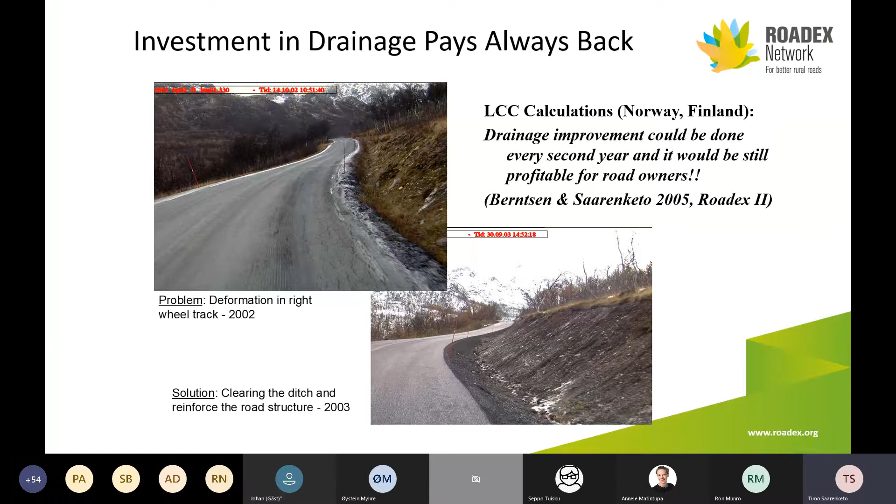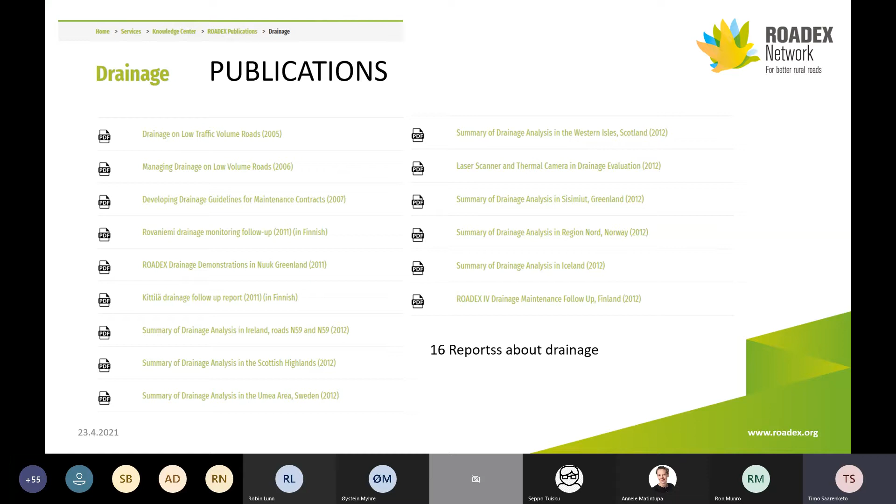The focus on drainage can also be seen when you look at the ROADEX publications. From the ROADEX history, we have already published 16 reports on drainage. So it's a good number on drainage, and then there are also other studies and publications out there. And about ROADEX e-learning, we've also been following people who are visiting and reviewing it. That shows that it's not only in the northern periphery area that drainage is a hot topic. In our review we have found that the drainage e-learning has all the time been the most popular.

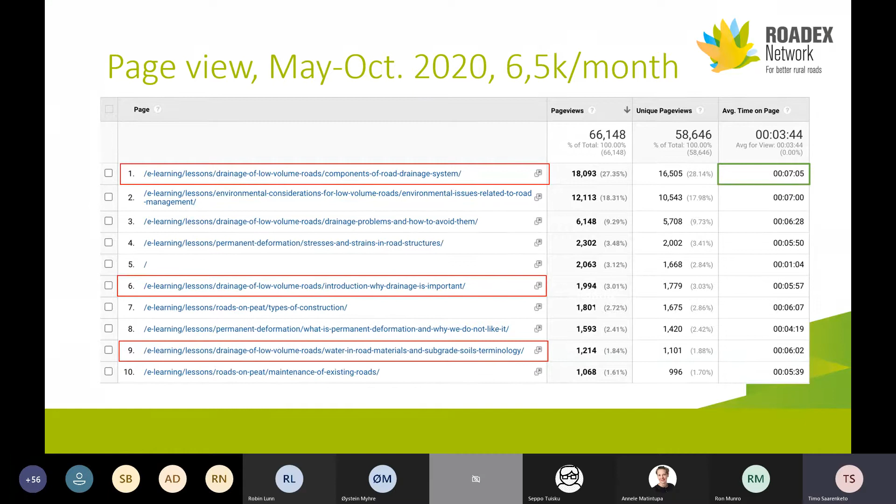And here you can see last year, from May to October, about 4 or 5 months. We have had about 6,500 visitors each month on the whole ROADEX web pages, but from May to October we have had more than 20,000 visitors only on drainage e-learning. And they are not just making a short visit, because the average time staying in this e-learning has been 7 minutes. So they've been really looking for that.

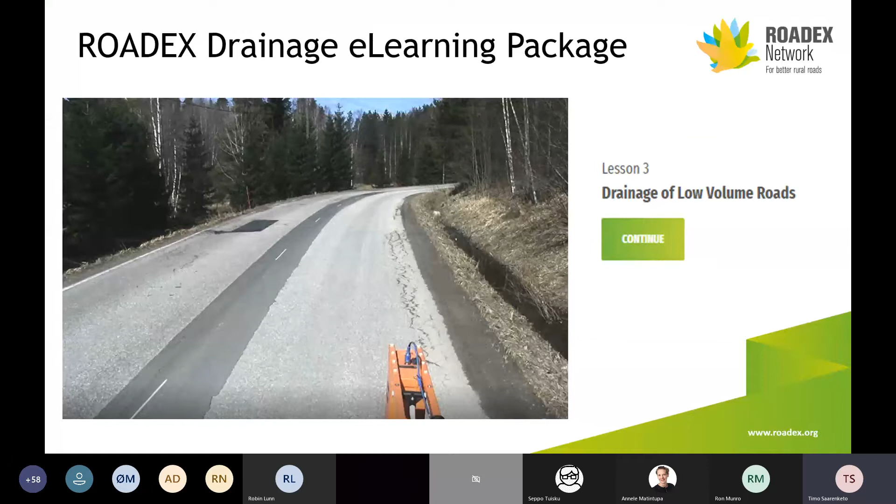But let's start with the drainage e-learning package and see what we can find there. First of all, the first lesson on drainage is what we call the introduction, where we tell why drainage is important. First of all, a little bit about history: even in Phoenician times they were using drainage structures. Then about drainage design and maintenance, erosion issues, splash and spray. And on the right-hand side, you can see one really nice example of the benefit of drainage. This is from Ireland, road N59, which was one of the test roads when we did a demo in Ireland, and it shows the rut depths in 3 classes, and rut and also factors.

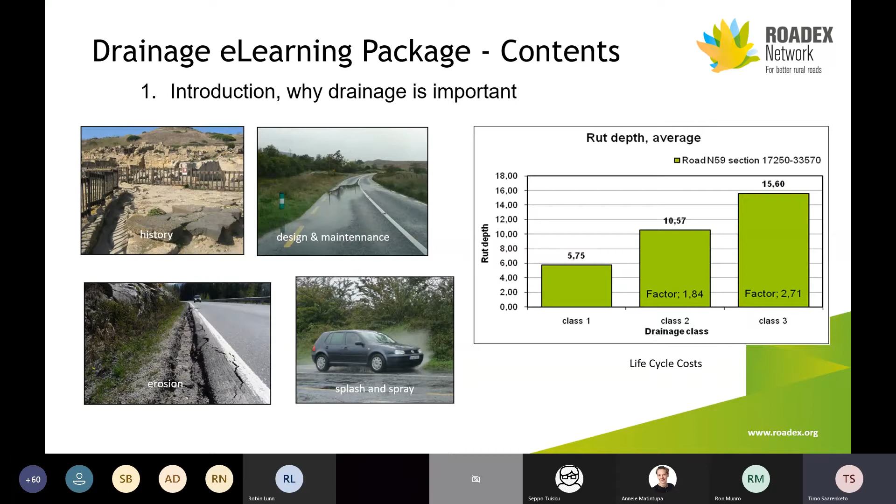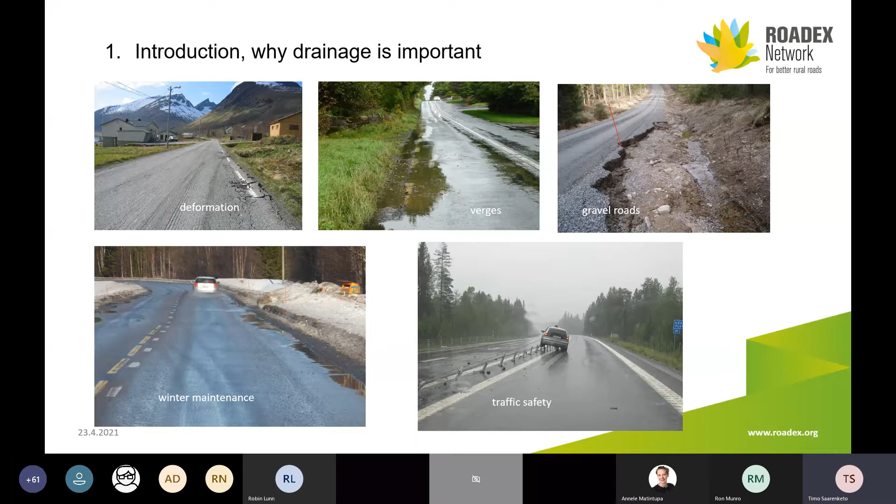In class 3 with the poor drainage, you can see that the rut depths are 2.7 times deeper compared with the road sections where the drainage is more or less okay. So in Ireland the issue is definitely permanent deformation when water is present. Deformation in general is the main issue causing problems, but also some maintenance issues, like soil verges or grass verges, are causing problems, as well as erosion issues and winter maintenance, which we will talk about later in this session, and of course traffic safety, aquaplaning. So water rutting is one parameter that we always have to keep in mind when talking about drainage.

In addition, when you are in cold climate areas, drainage can be related to differential frost heave and frost action. And why is that? Basically, in order to make ice lenses, there are three things you have to have in the road structure. One is minus degrees, and the other is that you have to have unfrozen water available in the structures. If you don't have water available, you cannot develop ice lenses.

And here's one nice example of Highway 4 from Rovaniemi, where this private or bicycle path access road culvert is not working, so all the water is blocked here and flowing under the road and making a frost heave which is more than 100 millimeters.

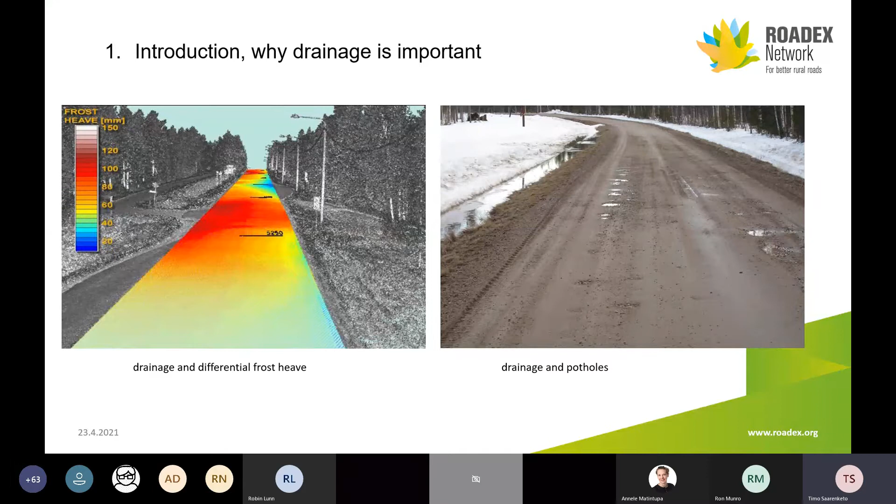Another issue when talking about low volume roads is on the right hand side, where we have found out on the surveys that potholes on gravel roads can be related very well to the presence of poorly working drainage, especially in the springtime, which is right now going on here in northern Finland. If your ditches are filled with water and the top part of the pavement structure is saturated, these potholes develop. In the continuous monitoring of these roads, we have found that when it gets saturated, even though you are grading, they appear again within a few weeks. So these issues where you have to send a grader to make gravel roads even can be related to the sections where your drainage has some kind of issue.

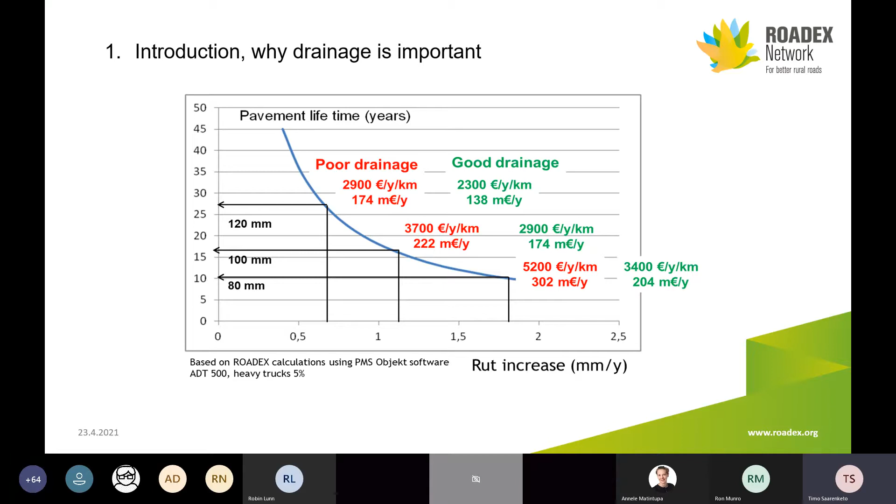Then, from the motivation side, about the science and theory of drainage, we have a pretty good package there, starting even from the molecular level: what is water and why it is important. What we are telling in this e-learning is that water molecules are bound when they are adsorbed from the air to the mineral grain structures in the pavement structure. They form different types of layers, and the important layer for understanding performance is what we call the adsorption water layer, which means that very close to the surface the molecules are very well oriented, and the orientation is so tight that it equals very close to ice. Then the bonding gets looser and looser until you start to talk about viscous water and capillary water.

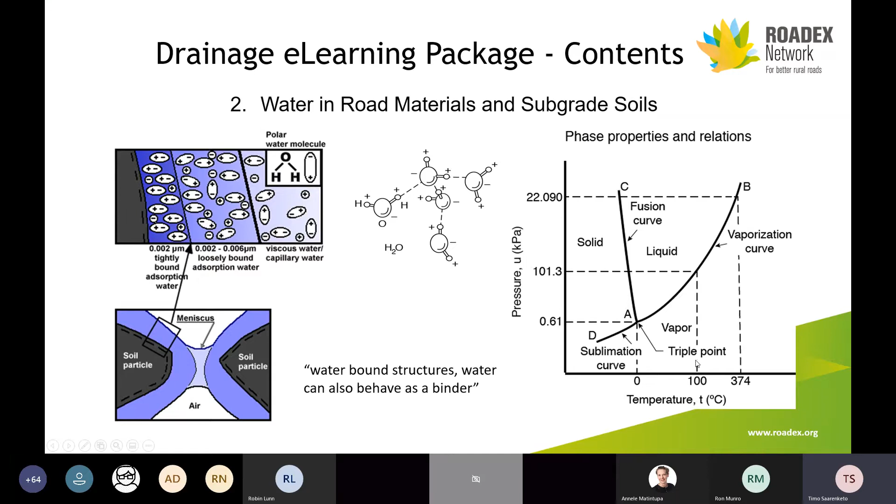But thanks to this orientation, we can tell also that water, when you are talking about what we call unbound pavement structure in general, for instance in the USA, many researchers talk about waterbound pavement structure, because water can also behave as a binder when you have enough compaction and water is very well arranged. It actually causes quite strong tensile forces between the soil or mineral particles in the pavement structures. Also then about different forms of water molecules, whether it is solid or liquid or frozen liquid, or in vapor form. So that is discussed. Then we also try to tell a little bit about the viscosity of the water, which is causing this tensile strength.

And here's one demo of what we can see and measure right now in the Percostations during the spring thaw weakening. Here's a demo about electrical conductivity during the thawing period in the mineral structure. So this light blue equals frozen material in the pore water, and these dots are colloidal particles, which are always pushed when ice is frozen, so colloidal particles are pushed between the mineral particles and ice.

And once the ice starts to thaw, these colloidal particles are first coagulated, they are spreading, and later on they are flocculating. And when they are flocculating, they are making bigger grains and the electrical conductivity is decreasing. But especially in this peak area,

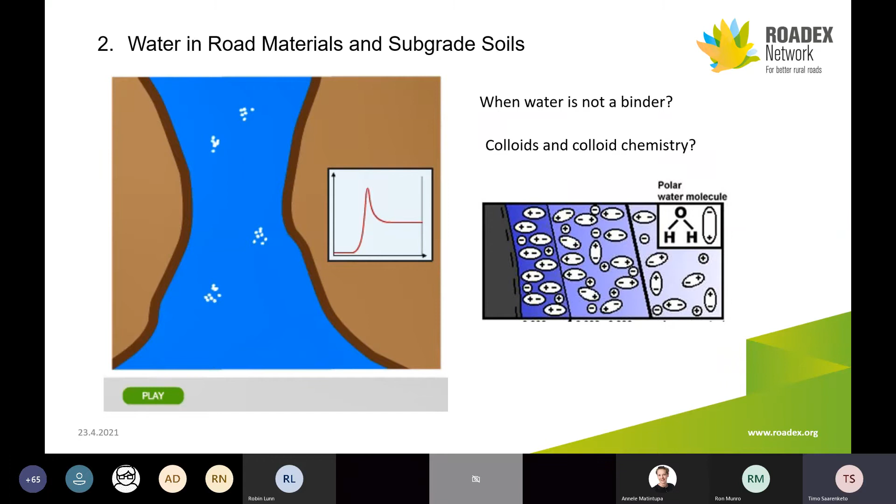when they are spread equally all over the water, the conductivity is high and the tensile strength is very low, and that is caused by colloids and colloid chemistry, like washing powders. When we are using washing powders and cleaning our clothes, it is exactly the same chemical principles. Then water zones, where you have a groundwater table, capillary water table, and then what we call intermediate

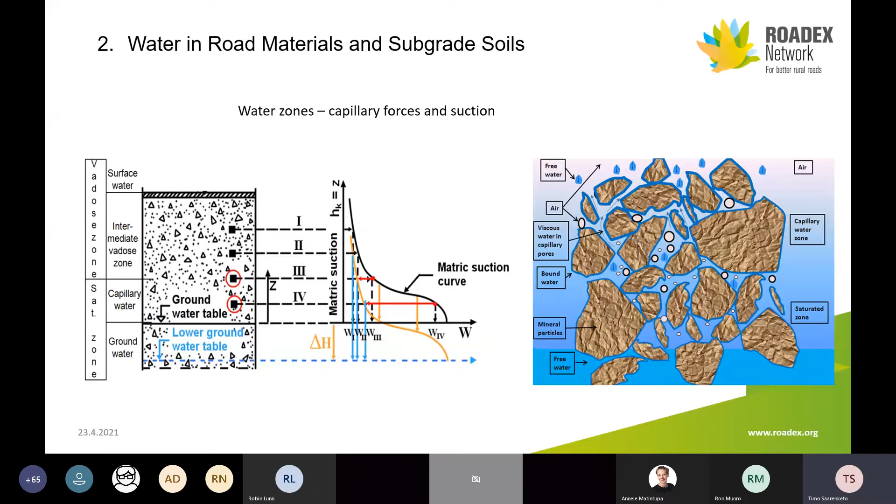water zone, which is what we call in general the dry material, and also in that way we compare back and try to explain very much on capillary forces and suction. In general, for instance, in Finland, suction has not been so familiar and has not been taught much in civil engineering, and we've been in general talking about only capillary forces. But right now in thermodynamics, suction explains much more clearly how the road is behaving.

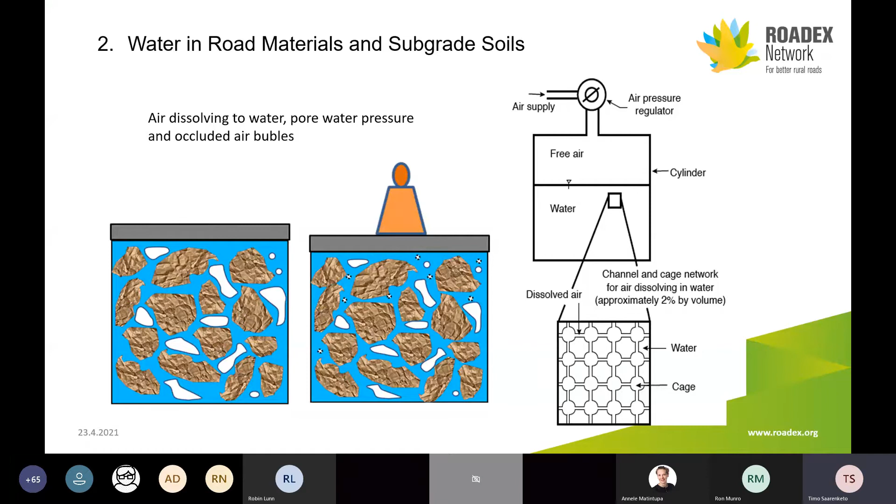Also, one important thing in order to understand the recovery times in the road is understanding the phenomenon that air in the pavement structure is dissolving into the water, and that is part of the pore water pressures and how the occluded air bubbles are behaving. And this can be related to the permanent deformation of the road structure.

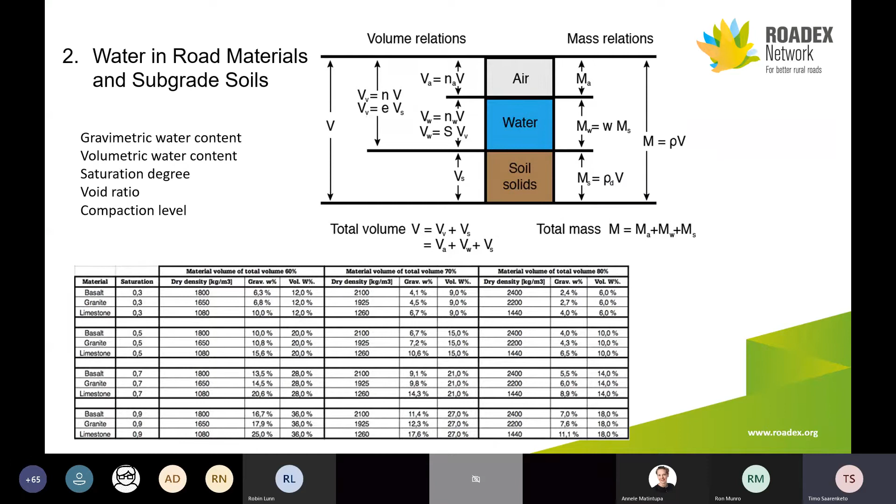Then a more easy and basic issue, which is still sometimes misunderstood and ignored, is what is gravimetric water content, what is volumetric water content, what is saturation degree, what is void ratio, and what is compaction level. In understanding this, water content can be volume ratios, but it can also be mass ratios. And there are some tables where you can get a very nice idea of what the densities are when your material volume is, for instance, 70%, what type of densities you are having at different moisture contents on gravimetric and volumetric water content. This helps understanding the compaction issues.

Also, water content is very much affecting compaction. The theory is about what happens when you are compacting in low moisture contents: you have to apply a lot of force in order to break this bound water structure to get good friction between mineral grains. But then the other issue is that if you are going higher than Proctor water content, which is the optimum water content, you might be facing problems with positive pore water pressure

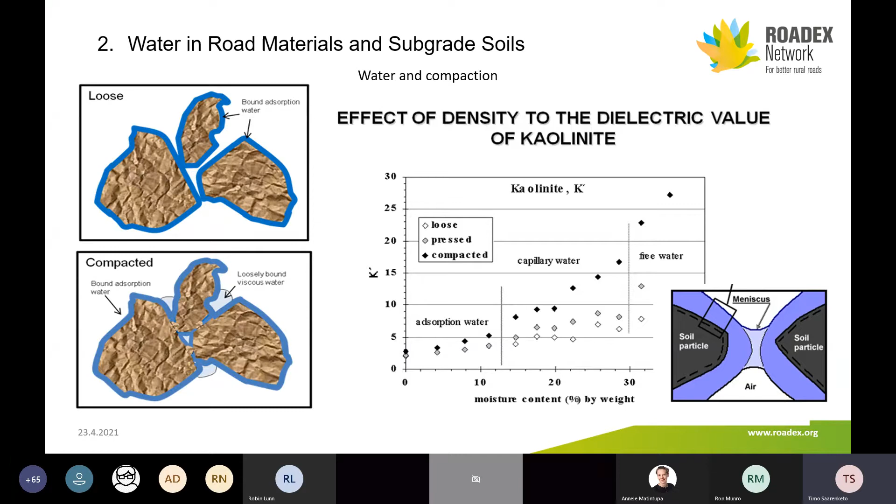and plastic deformation. So basically, for instance, this is a kaolinite clay with 3 different compaction degrees, and normally the optimum Proctor content is at the phase where your capillary water is, in kaolinite, around 20 to 25%. So that is where your capillary water still has a concave meniscus between the capillary water and the air. So you still get quite good strength.

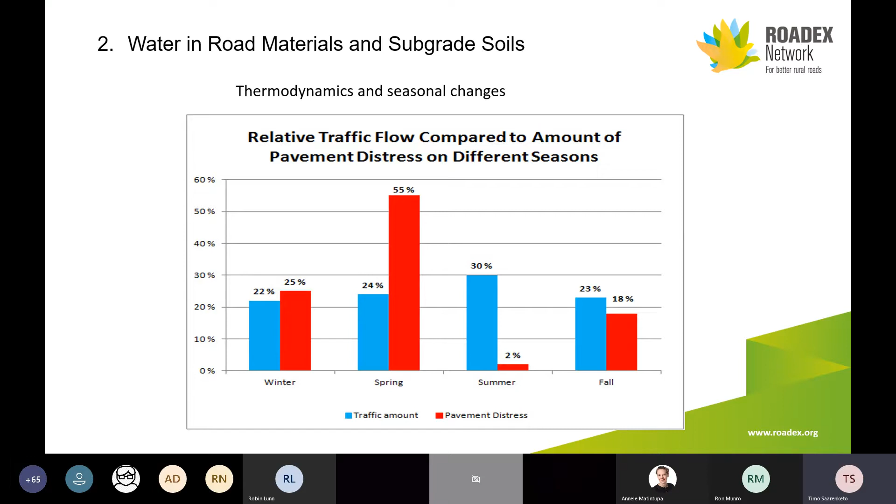Also about thermodynamics and seasonal change, understanding that when we are designing a road and making materials, we are assuming that pavement lifetime is a function of axles. But the fact is that if you are comparing traffic amount and pavement distresses, and this is also results from the USA, you can find out that even though the traffic volumes over the year are almost the same, 80% of the pavement distresses appear in winter and especially spring. And that means that pavement lifetime is not only a function of loading, but seasonal change also has a major impact on our lifetime.

And when we are talking about seasonal change in general, in thermodynamics we have to understand suction. And there are three types of suction. What we have to know is, first of all, in unfrozen material, it is matric suction plus osmotic suction, which equals total suction. And matric suction is very much a function of fines content. So the higher the fines content you have,

the stiffer is the material when it's dry, but it loses strength when the water content is increasing. It's like clay, a good example. On the other hand, osmotic suction is not dependent on water content, and a good example of osmotic suction is dust binders.

If you put chlorides in your gravel roads for dust binding, it causes so much tensile strength between the particles that you don't have a dusting problem.

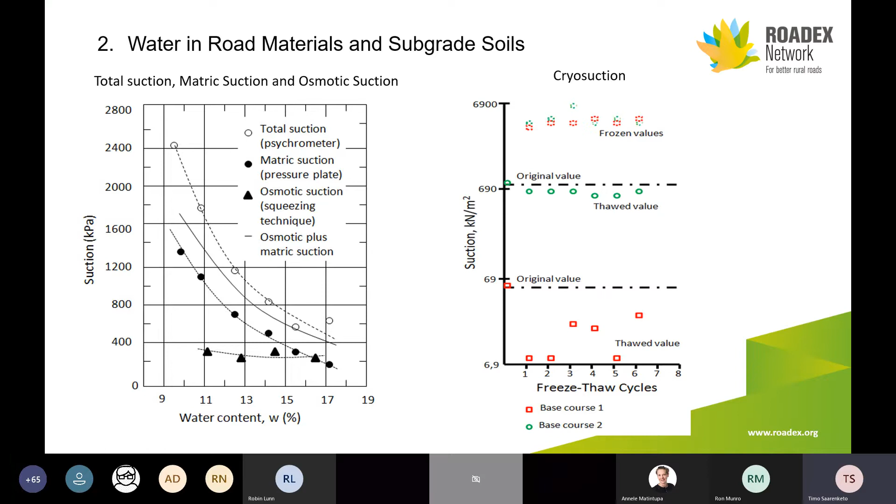Then, continuing with water and mechanical properties, it's a lot of material, but one issue, and this is a new understanding right now, is saturation degree and dielectric value. A very interesting finding, which we didn't know when ROADEX started, comes thanks to Andrew Dawson, who has written an excellent book, Water in Road Structures. He had a theoretical idea, and he published that once the saturation degree is around 80% in normal aggregates, then air bubbles are occluded.

That means that if you are compacting or loading the material, these air bubbles cannot escape anywhere. And that is increasing pore water pressure, or if you have a very high load, it causes the air to dissolve into the pore water, and then the water loses all these tensile properties. What was really interesting is that when we later calculated, Andrew Dawson's theory about 80% saturation degree equals a dielectric value of 16, and from ground penetrating radar data we knew that is exactly the plastic limit where, for instance, base course material loses its strength. So that starts to explain more about what happens when we have wet materials and we are loading them.

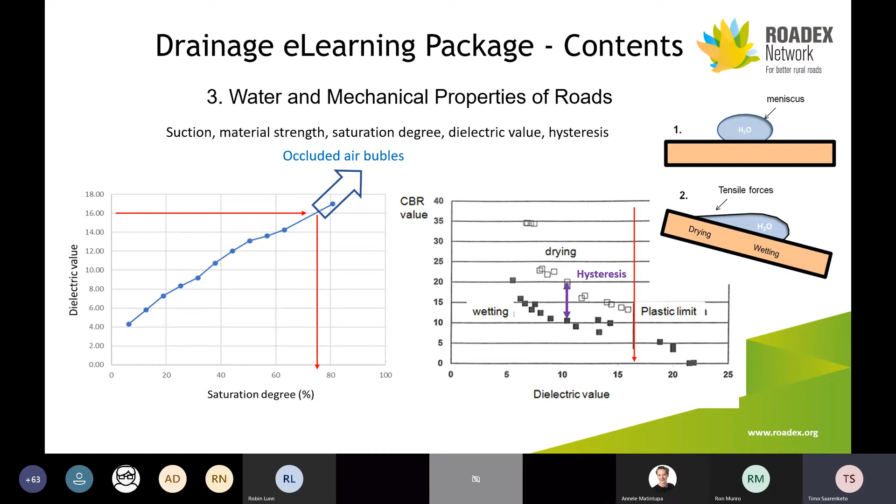That tells you the great difference, and it can be explained by hysteresis, which can be described as if you put a water droplet on a glass and then start to tilt the glass plate down, so you are developing tensile forces. That's the classical explanation of hysteresis and how it forms tensile forces when the material is drying.

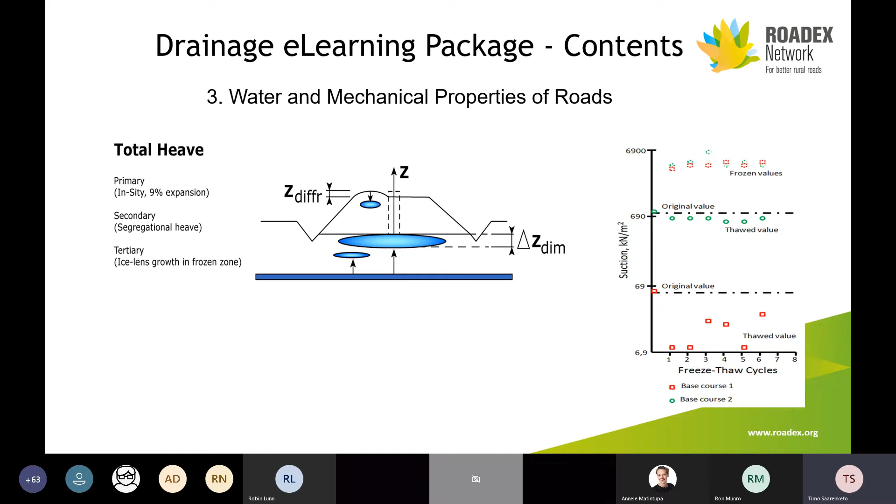Finally, a new thing explained in the updated ROADEX drainage e-learning package is frost heave, and especially these tertiary ice lenses. This is a new issue published and introduced by Swedish researchers from the Technical University of Luleå, and the term is tertiary ice lenses, the ice lenses that grow in the frozen zone. And what I'll show is that the theory explains very much what we have been finding on roads, especially if you have delayed snow removal.

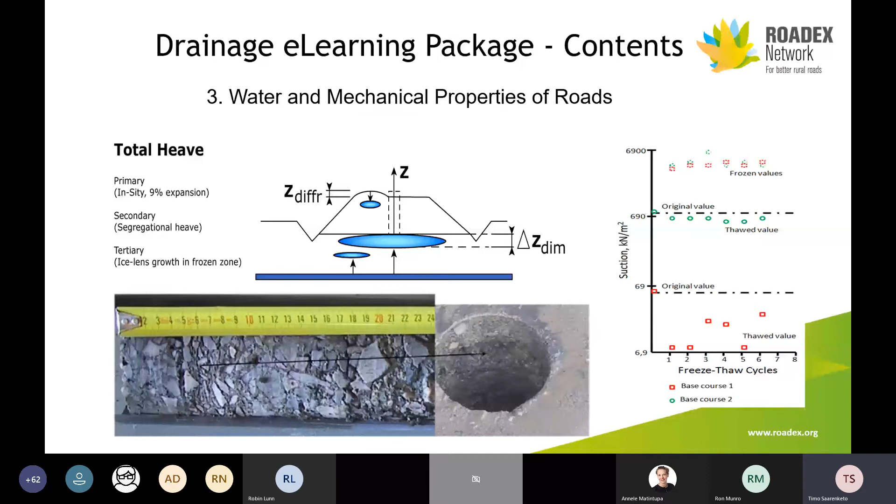Also, this high suction is an explanation for why suction forces can be so high that they can develop ice lenses even inside the asphalt. This example is from the first winter of the Kemi-Tornio motorway in Finland, where we had problems in the top part of the asphalt, forming ice lenses because of de-icing salt.

Then chapter 4 is explaining the components of road drainage systems. It is in general divided into three areas: road drainage structures, dewatering structures, and structures outside the road body. This road drainage and dewatering is interesting terminology, because for instance in the Finnish language we have only one word, kuivatus, which covers both drainage and dewatering.

But basically dewatering, in Swedish and English, means the structures that ensure that when it's raining, the water is removed really fast from the surface of the pavement structure, and the drainage structures in general are designed to keep the whole pavement structure dry.

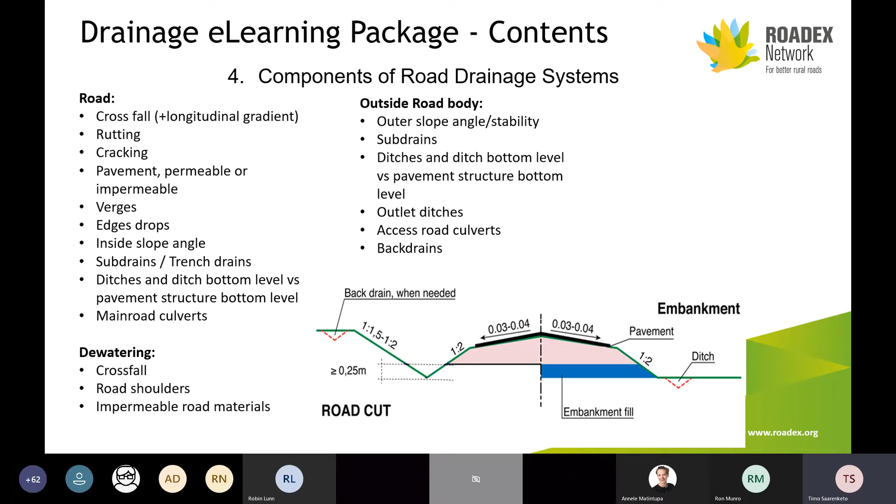Then we talk about the foreslope ditches. We are publishing new information about the importance of keeping ditches deep enough. Here are some case studies from research of the Pehko project, where we have been implementing this ROADEX know-how in Finland and testing it. This shows ditch depth from the pavement surface as a function of annual rut increase. What you can see is that on main roads in Finnish Lapland, the anomalous rut increase is mainly where the ditches are shallow, and the deeper the ditches are, the fewer anomalous structures you have.

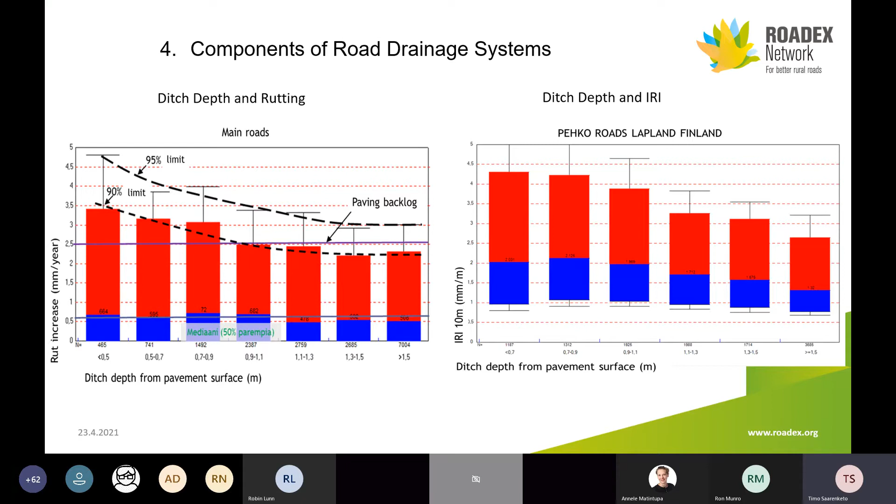The same issue, even more clear and even better correlation, even with the median values, can be seen if you start to monitor ditch depth versus IRI. Once you go to deeper ditches, for instance ditches less than 70 centimeters, median IRI is 2. When you go 1.3 to 1.5, you are already at 1.6, and if it's more than 1.5 meter deep ditches, median IRI is 1.3. So for road roughness and how smooth the road is, it's a clear correlation.

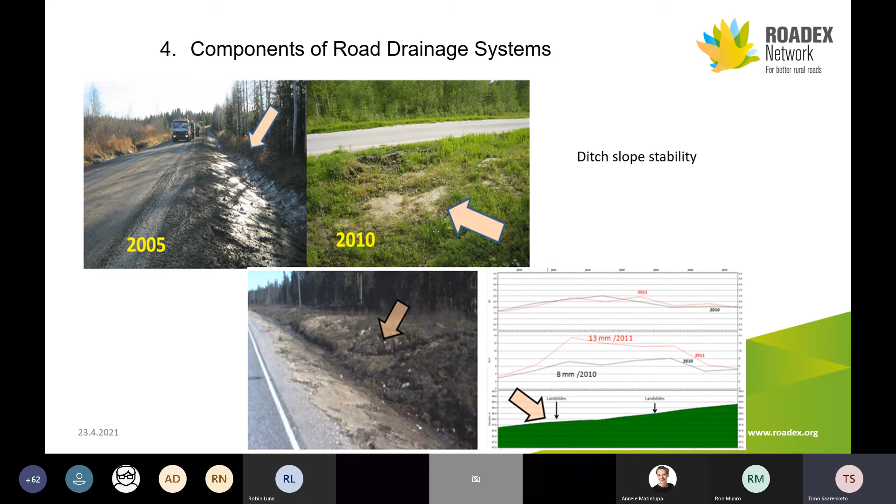Very important on the main road ditches is also slope stability, and how important in the daily maintenance it is, first of all, to check that all the ditches are clear, and if you have some flow and ditches get filled, you have to clean them immediately. There is an example that if this was not cleared, in one year you would get about 5 millimeter rutting, because all the water is infiltrated to the pavement structures.

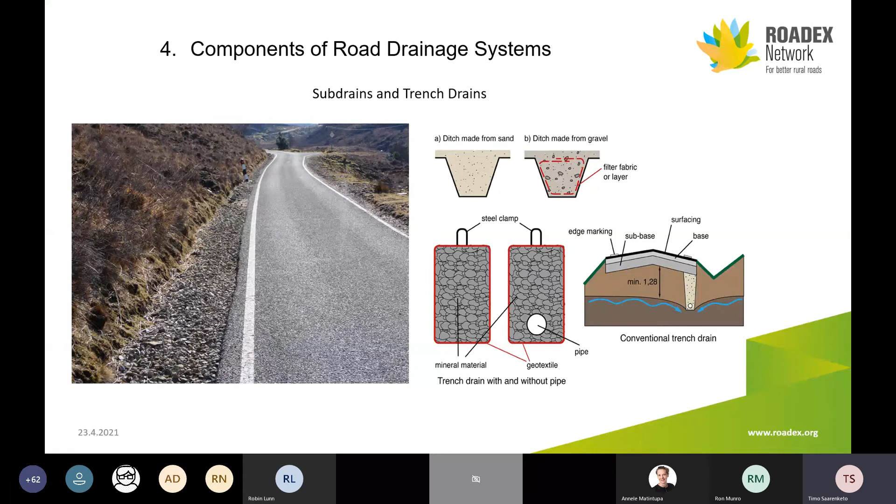Also in many areas you don't have enough space to make open ditches, or if you are in mountain areas, there are other issues. There are chapters and explanations about different types of subdrain structures and trench drain structures, how they are built, and what things should be kept in mind on these structures. Then, I don't have an example, but there is a lot of explanation about outlet ditches, what problems there are, and what you have to keep in mind when working with them.

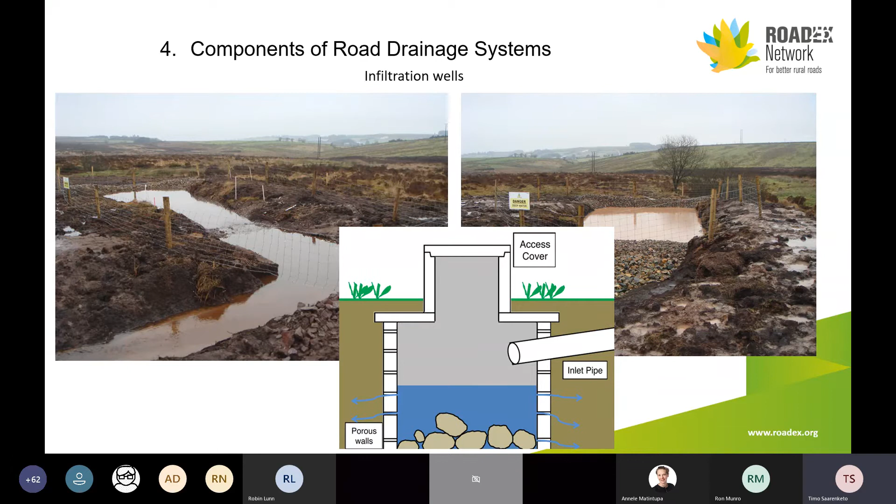But one issue, and these examples are from Scotland, and what we've been hearing also from other parts of the world, is that if you cannot make outlet ditches for some reason, then a very good option is infiltration wells and their structures. For instance, in national parks or nature protection areas where you cannot excavate ditches, you probably can make an infiltration well to ensure this water infiltrates to the subgrade soil, and it can be a very environmentally friendly structure.

Then also experience and information about main road culverts: how you should install main road culverts, what the no-go structures are, and what issues you have to keep in mind when you are building and checking that your main road culverts are built in a good manner.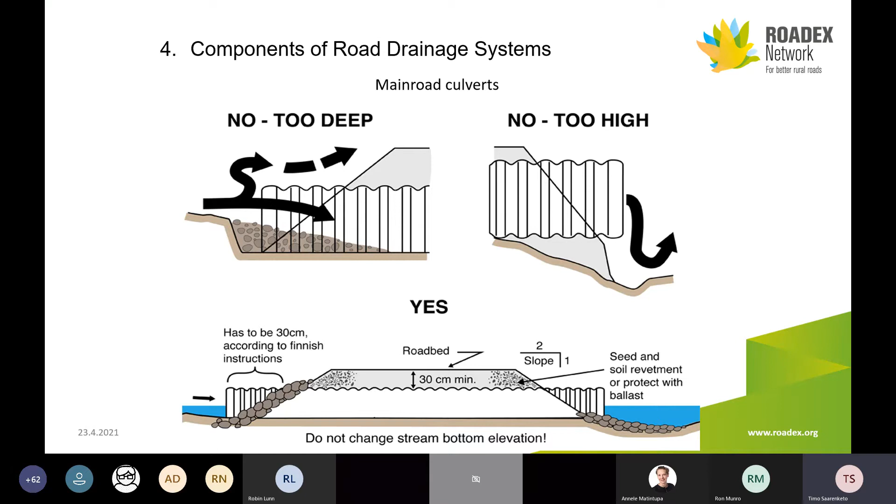Then about dewatering, one issue is pavement crossfall, how you build that, and how you make sure that pavement crossfall is made in such a way that water is quickly removed from the pavement structures, and you don't have a risk of aquaplaning.

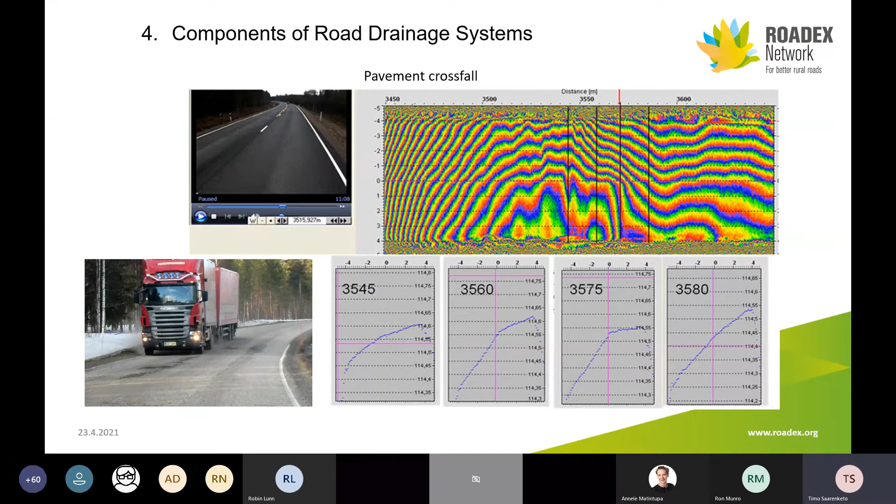But on the other hand, in this case we are also showing an example of how important it is to have very smooth changes in the pavement crossfall, especially when coming into or leaving curves, because the ROADEX reports about traffic safety and human body vibration have shown that, quite surprisingly, about 50% of truck accidents can be related to a road with a rapidly changing crossfall. So this is also a traffic safety issue.

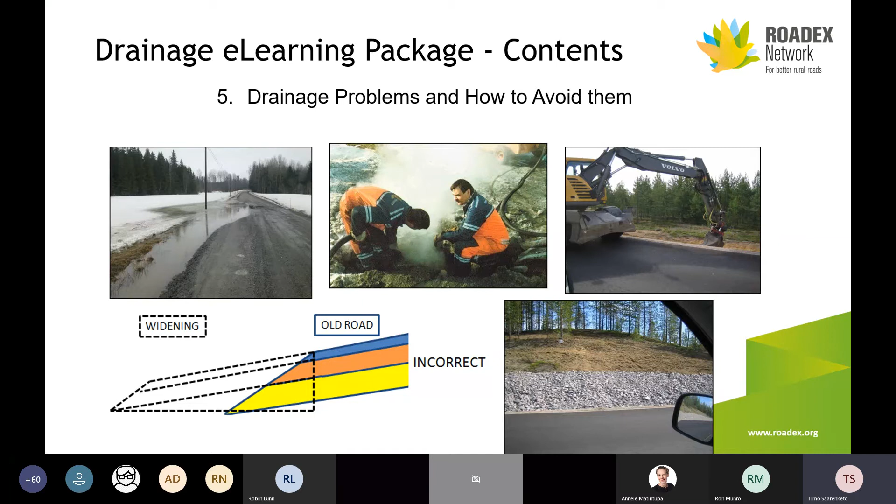Chapter 5 in the drainage eLearning is drainage problems and how to avoid them. We've tried to list all the typical problems, what can be done, the correct ways to do maintenance or road design, and how you can fix these problems. As a very simple example, we can still see these mistakes: when clearing the ditches, you excavate the dirt or mud from the ditch bottom and put it on the inside slope.

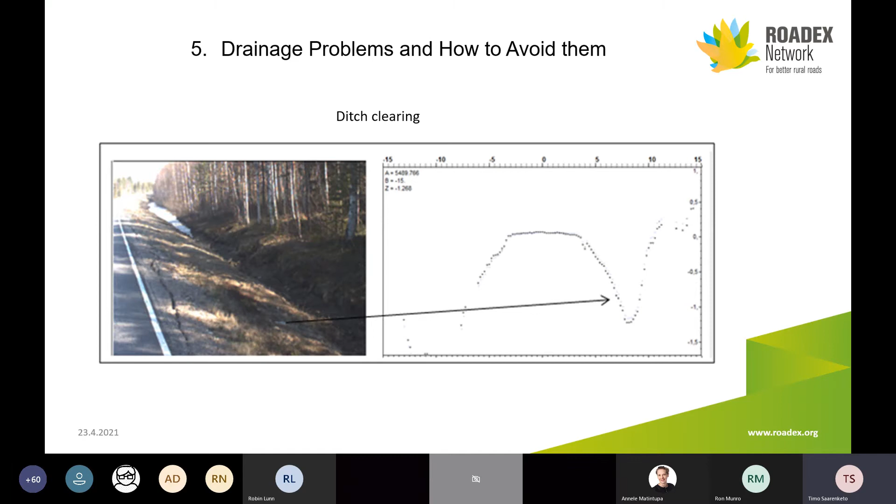There is a lot of experience now that if you store this mud or dirt there, it flows almost immediately back to the bottom of the ditches. You can even see here that it is already starting to develop cracks in these areas, and within only 1 or 2 years the material is back on the ditch bottom.

The other issue, a very new finding that I already mentioned, is snow removal from the road shoulders. If you have thick snow walls and in winter you have warm days, and the water from the thawing snow starts to flow, at the same time you have very high frost suction in the base course under the pavement, and negative pore water pressure, so all the water flows there. When cold days come again, it freezes and forms ice lenses, and you can have like 120 or 130% saturation level. And when this finally starts to thaw, you have a problem.

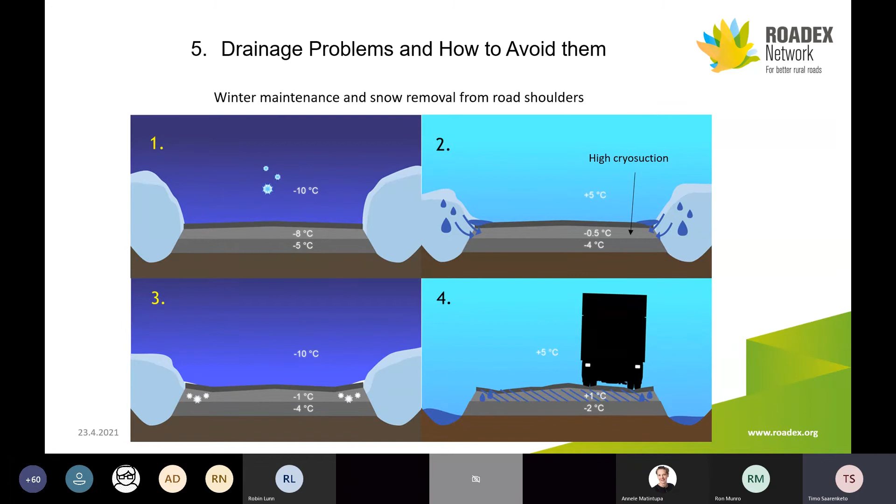You have major deformations on this way. We have very dramatic experiences about this phenomenon from previous winter in Pehko area in central Finland. Here's a nice example also of how clear you have to do work on that, which is these reflection poles.

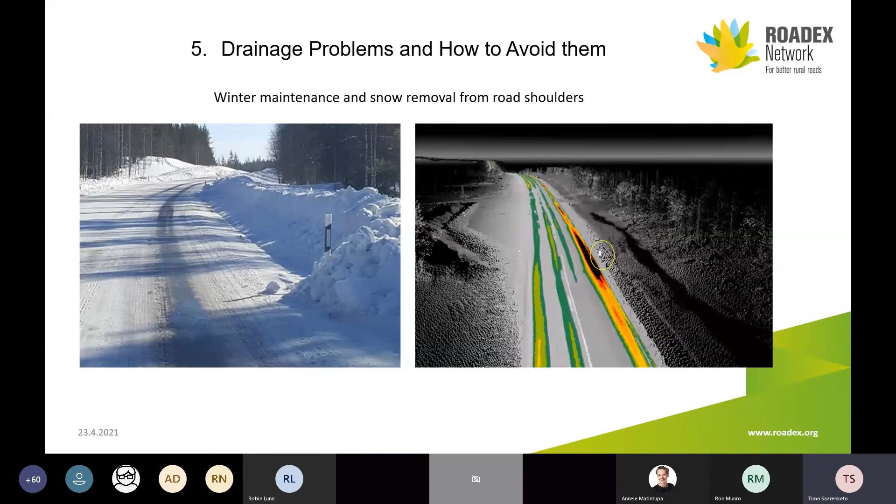In the early days, there were no machines, so you had to go around when you were removing snow. When we started to measure with the LiDAR laser scanner, we could find in road sections that always on the snow pole you get high rutting. Even this amount of snow could cause a localized deformation on the pavement in these tracks, in these sections.

Also private access roads - this is also Pehko. Research has shown that about 10% of the annual paving cost can be increased by poorly performed private access road drainage problems.

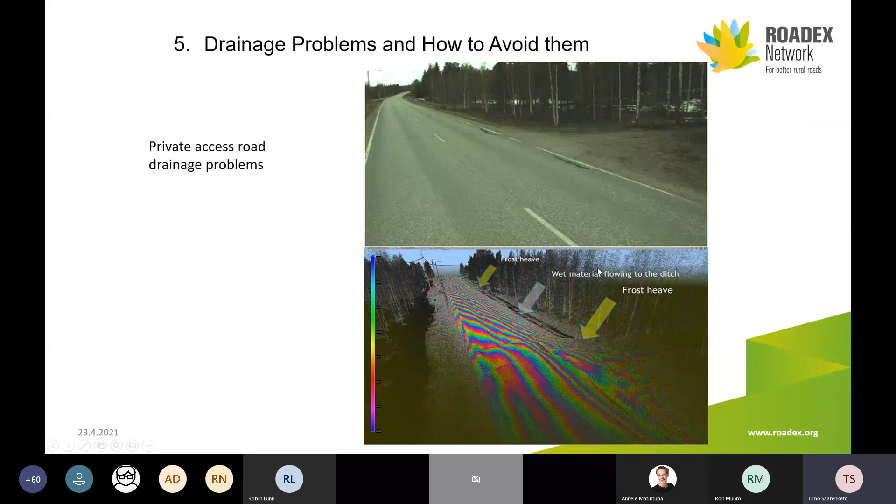The issue is that it's not only on the access road, but if it's making a pool above, you can get the first frost heave issue where the pool ends. Then you have wet mud flowing to the ditches, and finally in this area you have the frost heave. So it can be a long area where this missing or clogged culvert can cause problems.

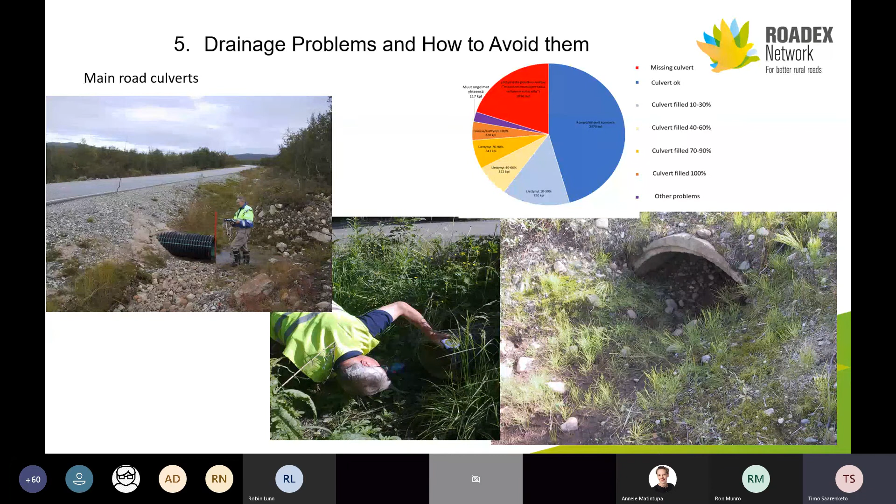But also main road culverts - we are describing how to check them, how to process them, what are the methods, how to check the condition, how you can show where they are, and how you are checking, for instance, the percentage of how much the culvert is filled.

Then there are some technical descriptions about, for instance, outer slope support and drainage structures. If you are on sloping ground, side sloping ground, and your material is unstable and flowing to the ditches, then you use this kind of structure where you are basically making a subdrain on the bottom of the ditches.

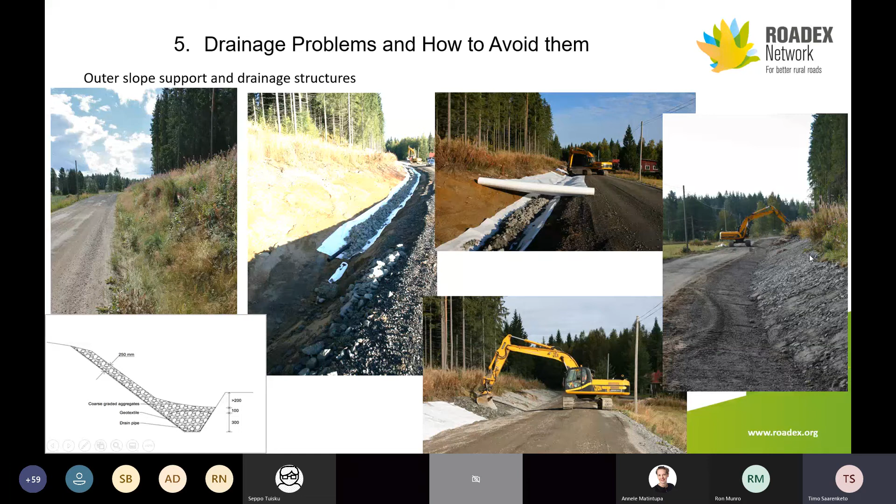And partly filling the ditches. We've been testing this in central Finland, and these structures were made with Tampere Technical University, with very good experiences.

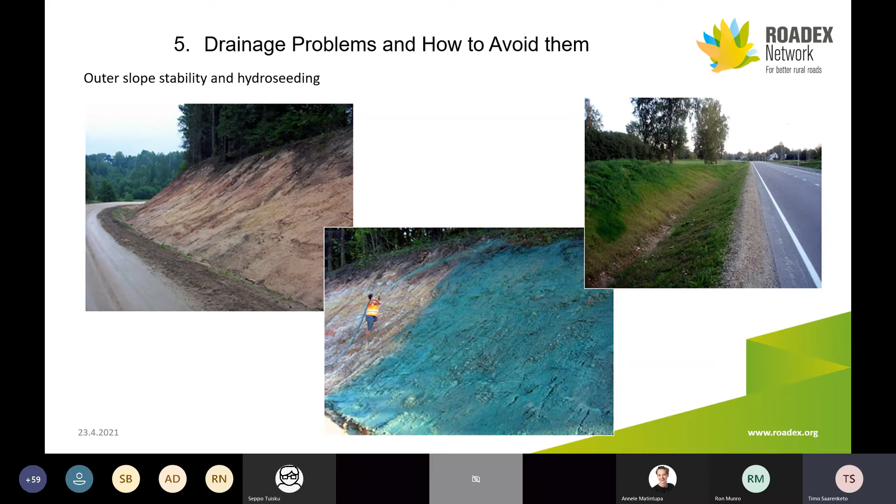Also some more exotic solutions like hydroseeding, where you are stabilizing the surface with a sort of bio-glue and grass types that make deep roots, with quite good experiences of these structures as well.

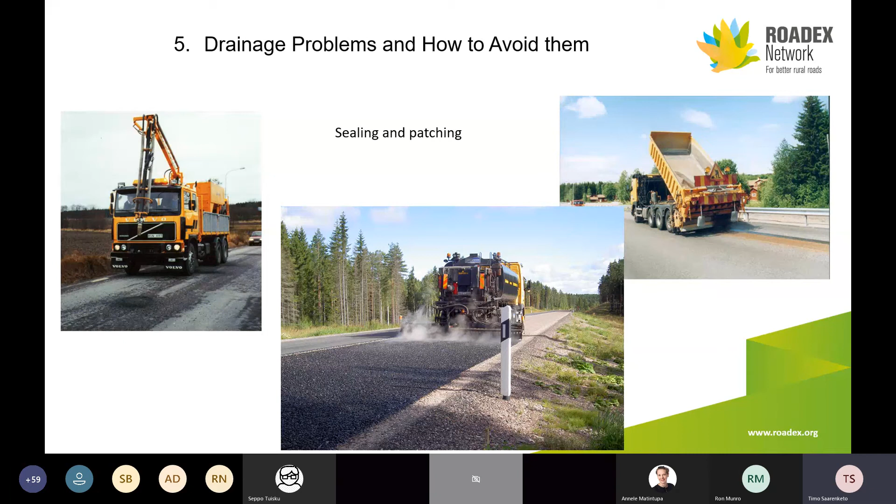And finally, sealing and patching, and remembering that drainage is also important when you are sealing the pavement. When you start to get micro cracking, you can avoid water infiltrating into the pavement structure by doing sealing structures, surface dressing, etc. There are some descriptions on that.

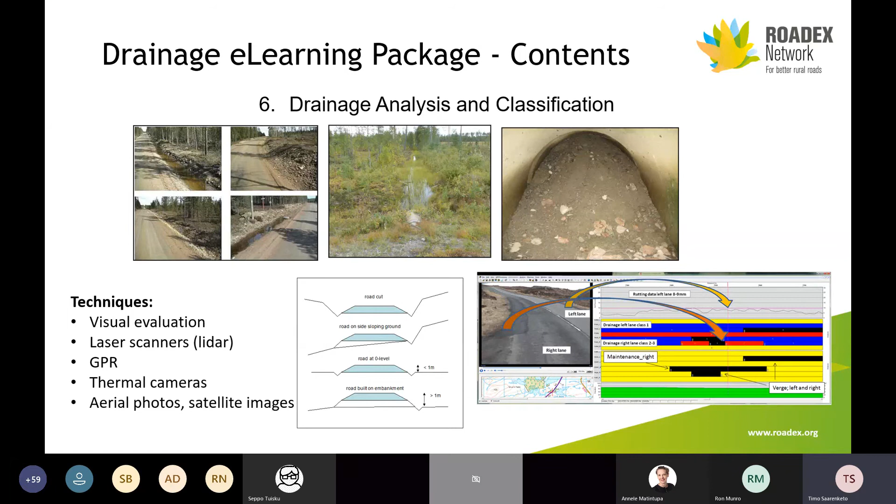Then drainage analysis and classification - Chapter 6: visual evaluation, laser scanners, ground penetrating radar, thermal cameras, and some new things about aerial photos and images. So there's the classical issue of how you do visual and laser scanner based analysis.

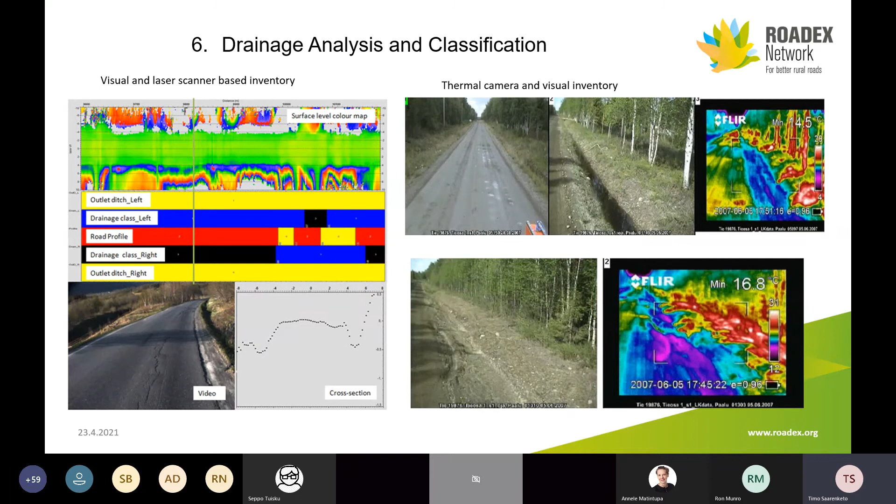Also in special cases, especially on gravel roads, thermal cameras are very good at finding ice lenses and evaluating where the critical places are on the roads that need special drainage attention. Laser scanner use has grown over the ROADEX time. Laser scanner is probably the best innovation that has been spreading for drainage analysis.

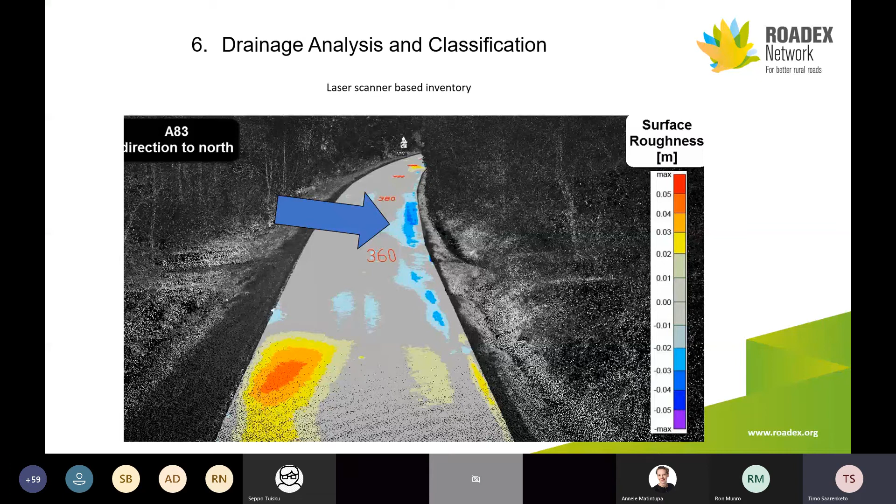Here's an example, for instance, from Scotland, Road A83, where you see water flowing, and then there's a private access road with a missing culvert causing ponding over there, and this water is now infiltrating into the pavement structures, causing this deformation. This is what you can see everywhere in the world where you are using LiDAR structures.

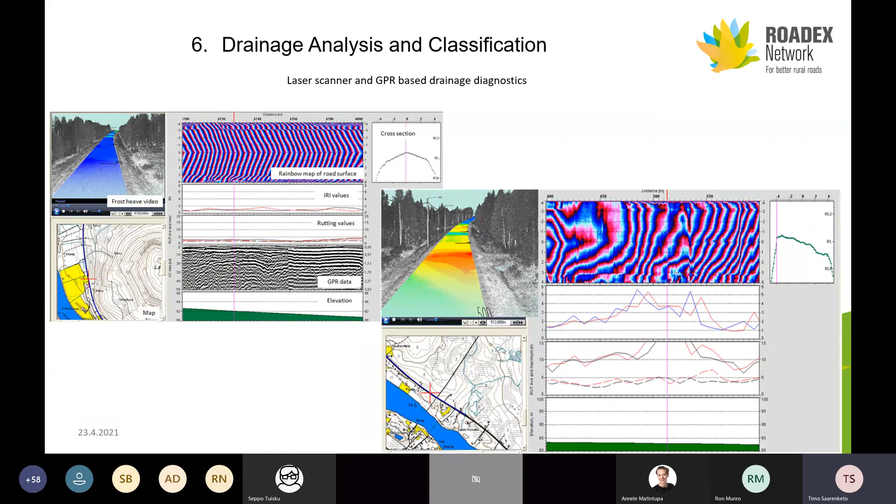Then we are also telling about how you are combining laser scanner and GPR-based drainage diagnostics - how a good road with a well-working drainage system looks, with good crossfall where you don't have IRI rutting or moisture, and on the other hand, what a road with a drainage issue looks like, how the deformation looks, for instance on the LiDAR - what we call the LiDAR rainbow map - is another way of getting something very visually clear, understanding that now I have a problem.

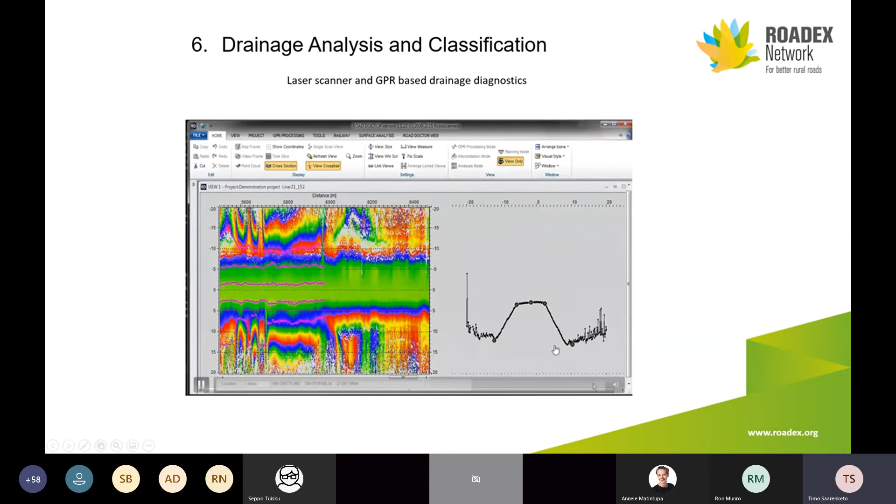Then also laser scanner data is very good for quickly checking the ditch bottoms, because you can make a cross section and map where the road surface is, the road shoulders, and where the ditch bottom is.

And once you have done that, and once you have, for instance, ground penetrating radar for the pavement bottom, you can check if your ditches are as deep as they should be. In Nordic countries, the specification is that ditches should be at least 25-30 centimeters deeper than the pavement structure bottom.

And here's a nice case. The pavement structure bottom is here - there's also the inner slope angle, but the pavement structure bottom is the red one, and the ditch bottom is here. Now on the right-hand side, you can see the ditch bottom is much higher than the pavement structure bottom.

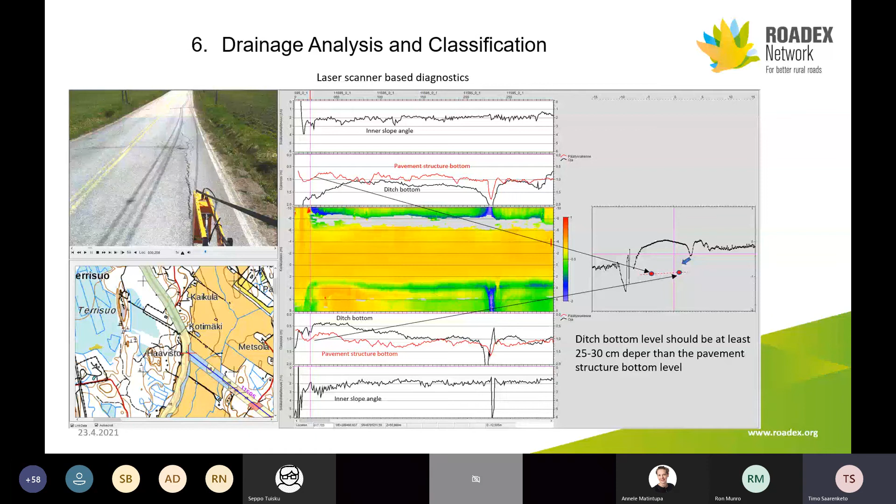That causes water from the ditches, if it's a silty soil, to flow into the coarse grain pavement structure. The consequence is you can see wide cracking, because this has probably lost its strength, and during loading you've been causing shoulder deformation or major shoulder failures.

MDI technique has been made also thanks to ROADEX drainage research. This was made as a sort of spin-off to New Zealand. We used this ROADEX know-how. We were telling about ROADEX drainage technology at a low volume road conference in New Zealand with Ron Munro. We were there, and New Zealand wanted to test how this technology could be used there too. We did a pilot.

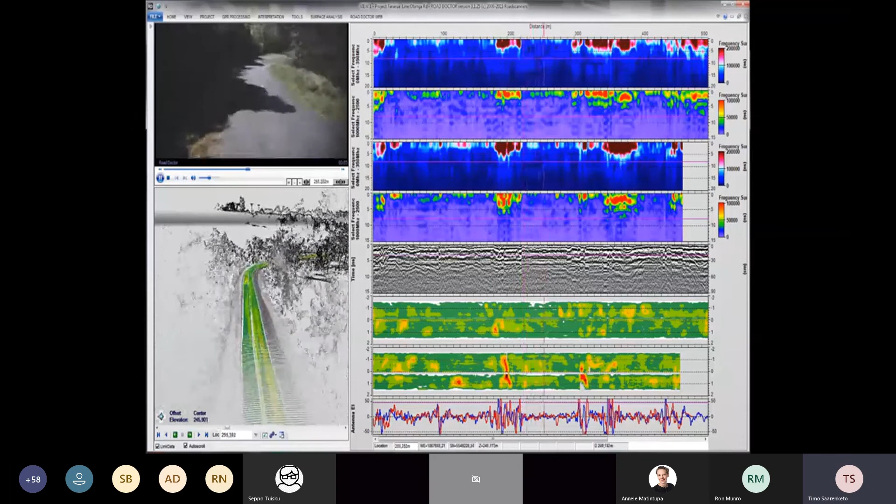We calculated a saturation level with the GPR, and the results were excellent. First of all, we could show that whenever you had moisture under the pavement structure, you have a problem, a deformation, and a roughness problem. So with ground penetrating radar, the good part is that it's not only the drainage structures, but you can also measure where the water really is under the road.

We've been continuing this work also in Finland, calculating the moisture content at different depths. Here's a nice example of what happens if you are not sealing a transverse crack. Water goes through the transverse cracks and saturates the top part of the pavement structure, and then you can see very high deformation around roughly 10 meters of the pavement structure, only because of this unsealed crack.

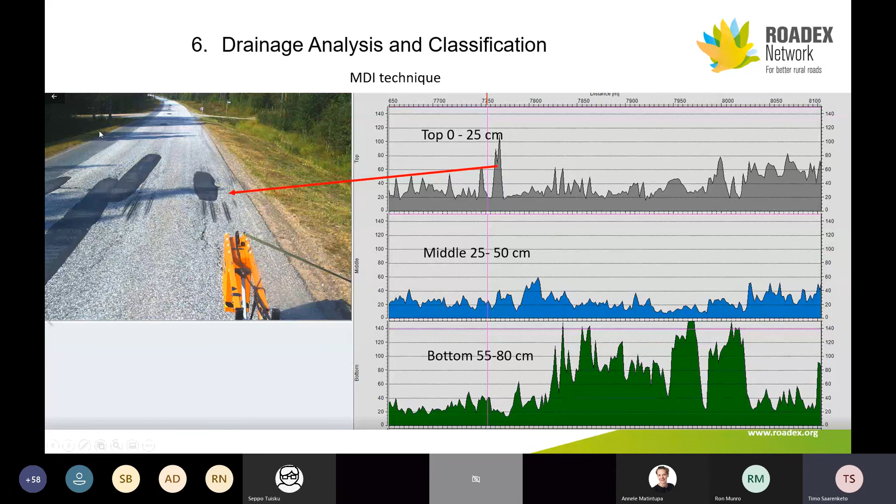On the other hand, if you go deeper into the structure, here you can see that the bottom part of the pavement structure has high moisture content, because most likely this private access road's drainage system is not working, and there's a lot of moisture under the pavement over there.

Finally, this MDI technique is not yet in the new e-learning. We will probably upgrade it a little bit later, but it can show how moisture is also infiltrating the pavement structure.

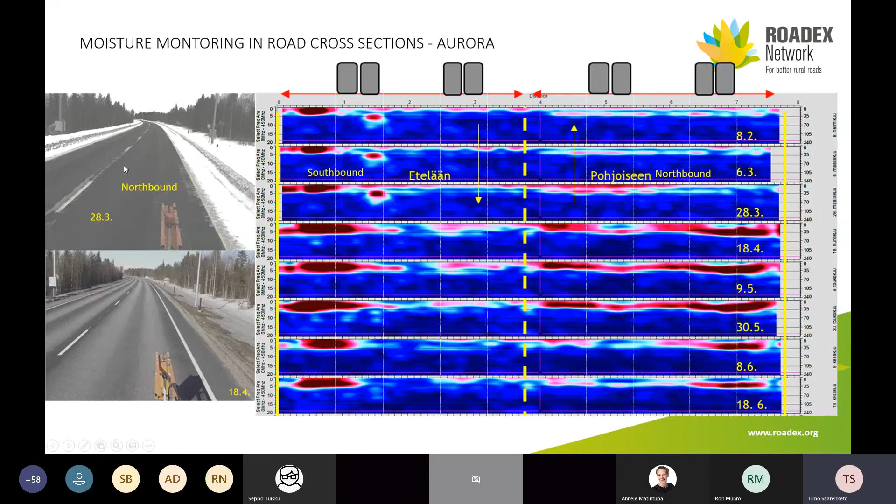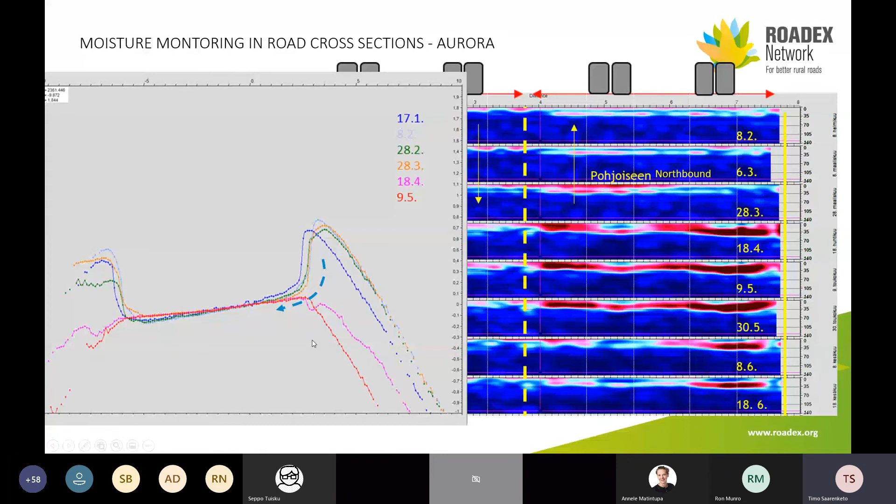Where I was telling about snow walls, it was very much doubted whether the moisture in the snow wall really goes into the pavement structures. But what we can show in these results, from GPR data, is that this moisture can now be seen when it starts to thaw. It goes and saturates exactly the area where you are then forming ice lenses and frost heave, later causing rutting.

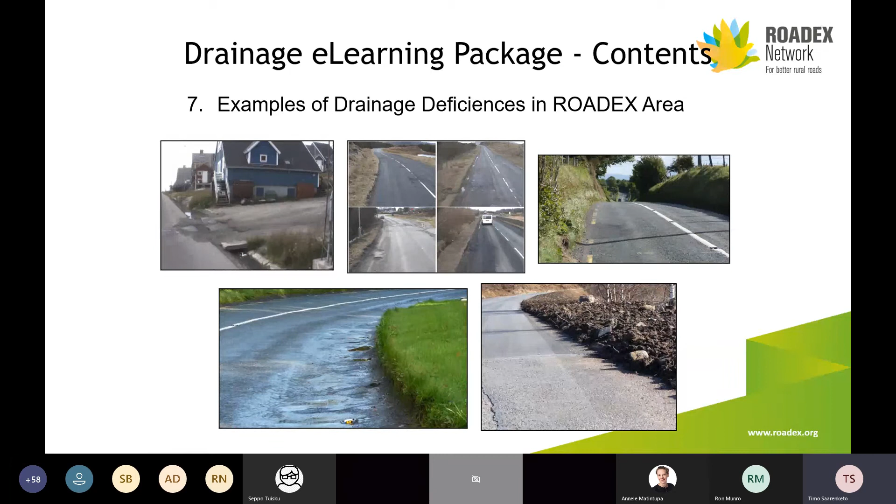Finally, at the end, there's an example of e-learning on drainage deficiencies in different ROADEX areas. I won't show any examples of that, because you can find them yourself where they are. But the last three slides just show how important this drainage is.

These results are from the drainage Pehko project in Finland, where we've been checking this and finding the key reasons behind pavement breakdown. Three issues out of seven share the common factor of drainage problems: private access road junctions, side ditches, and winter drainage problems.

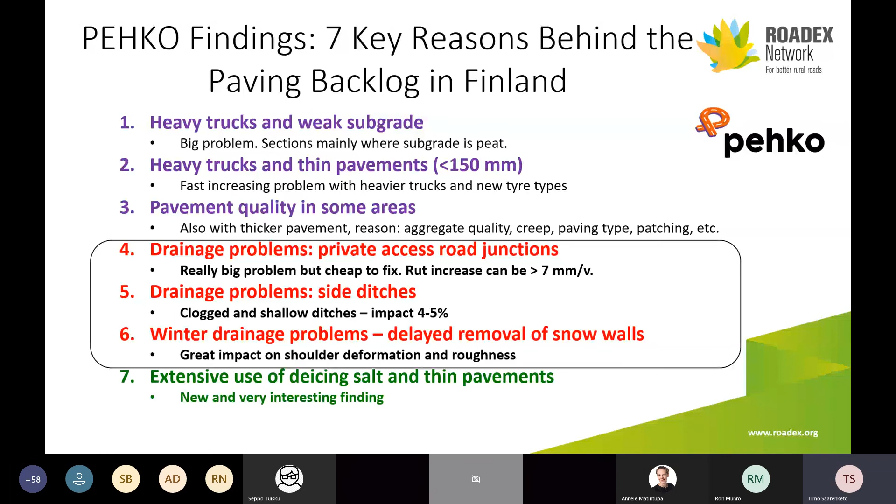And they are very important, and we've been developing systems so that you can have a method of screening potential sections for drainage improvement.

Here's a nice example from the Uusimaa area close to Helsinki, where we've been selecting visual drainage class 2 and 3, where the ditch is 10 centimeters higher than the pavement structure bottom, annual rut increase is higher than 2 millimeters per year when it should be much less than 1 millimeter, and pavement age is a maximum of 6 years.

So these blue and red dots are areas where you could still save your pavement structure. It's relatively young pavement, but it's already failing, and there's enough evidence that the main reason is drainage.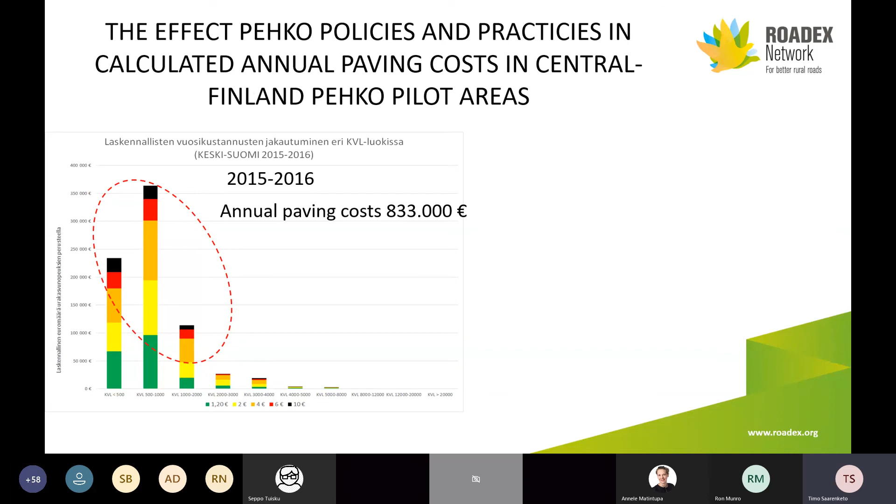We checked these expensive sections, and a big part of them were due to drainage. We improved the drainage management, and after 3 years we've been able to cut down about 36% of this cost. Out of all this cost, we can say 20% was thanks to better drainage maintenance.

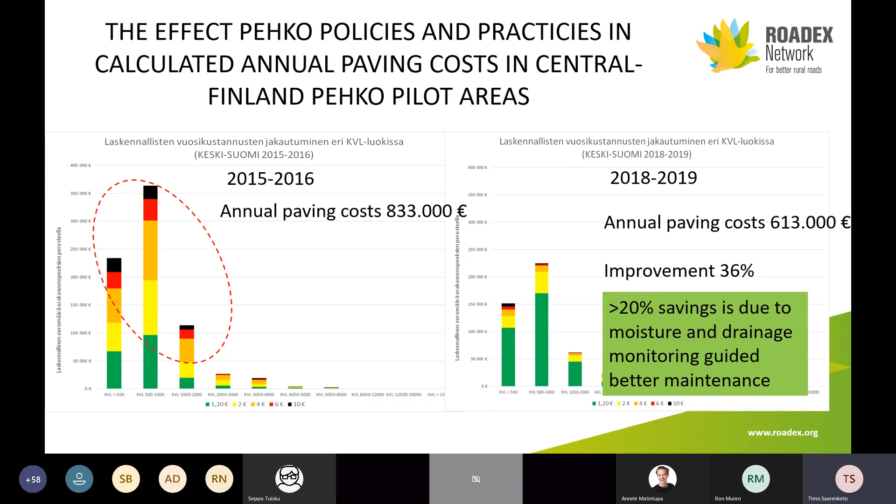So, as I said in the first slide, this just shows that good drainage work always brings your money back.

That was a summary of this drainage e-learning, what you can find there, and a few ideas about where we are going now. Thanks to digitalization and new technologies, we can much better handle drainage, and it has been, and still is in the future, even more profitable work in this road asset management. So thank you.